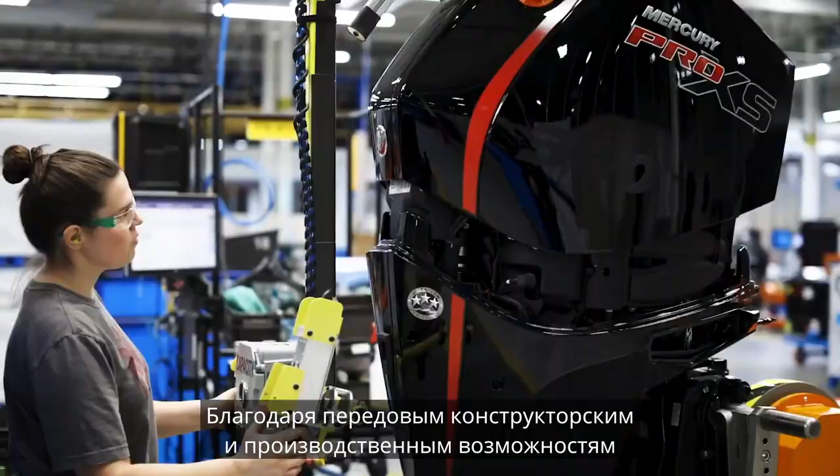Ours is a history of firsts and foremosts, a history of constant improvements. Through advanced design, engineering, and manufacturing capabilities, we've set and reset the standards for reliable performance, superior power, and unmatched fuel economy.

Our unyielding pursuit of innovation is why nobody has given boaters more ways to propel their on-water activities with unrelenting reliability, comfort, and efficiency than Mercury Marine.

Today, we once again redefine the way horsepower meets the water.

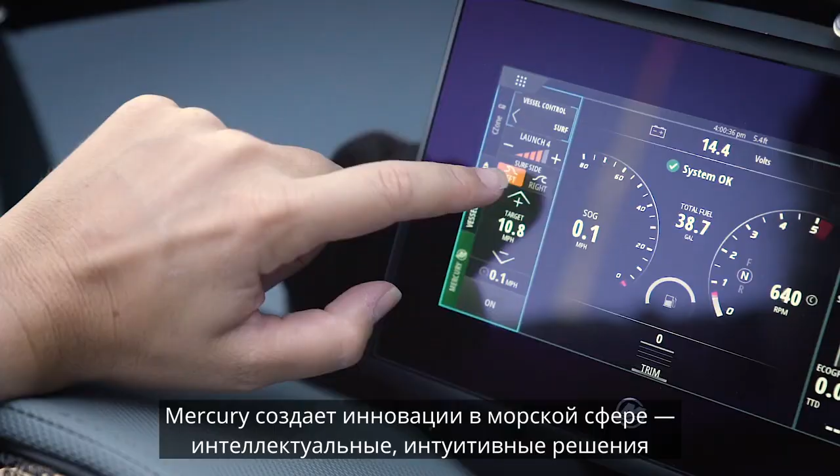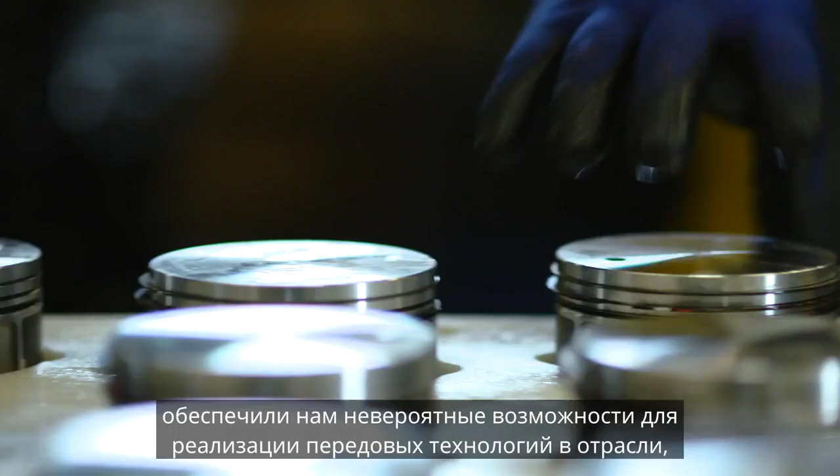At Mercury, we're driving marine innovation forward with intelligent, intuitive solutions that improve the boating experience. All of our investments in engineering and in manufacturing over the last 15 years have given us incredible capabilities to deliver advanced technology to the industry.

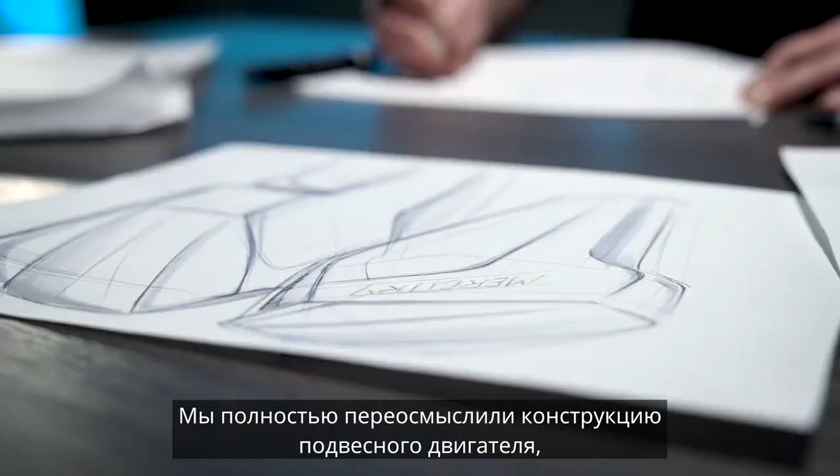I'm Chris Drees, President of Mercury Marine. I'm really excited to share with the world a product that exemplifies Mercury's commitment to innovation. We completely reimagined outboard performance to design an engine that delivers boaters the freedom, luxury, and power to pursue their passions on the water. In order to bring outboard power to larger boats, we started by changing the limits of what you can accomplish with the marine engine.

It's incredibly reliable with less maintenance required. It delivers remarkable fuel efficiency and range. This is the outboard that lets boaters go farther and do more.

We really pushed the design to make this engine not only more elegant, but also improve the experience while underway. It's the quietest high horsepower outboard ever built. It's remarkably smooth. It truly elevates the standards of premium design and engineering to make your time on the water more enjoyable.

Then we focused on the driving experience and created a new way to steer an outboard engine. With the engine static on the transom, nothing moves above the water. But under the water, the twin-prop gear case steers independently.

Our digital controls and joystick piloting, combined with this innovative feature, make close quarters maneuvering simple enough that anybody can do it, while also delivering exceptional handling at all speeds.

And of course, we didn't hold back on horsepower. We built the most powerful outboard in the history of Mercury. It has an incredible V12 naturally aspirated power plant, 600 horsepower, and the outboard segment's first 2-speed transmission, which can power the heaviest boats out of the hole quickly while contributing to unsurpassed fuel economy and sound levels at cruise.

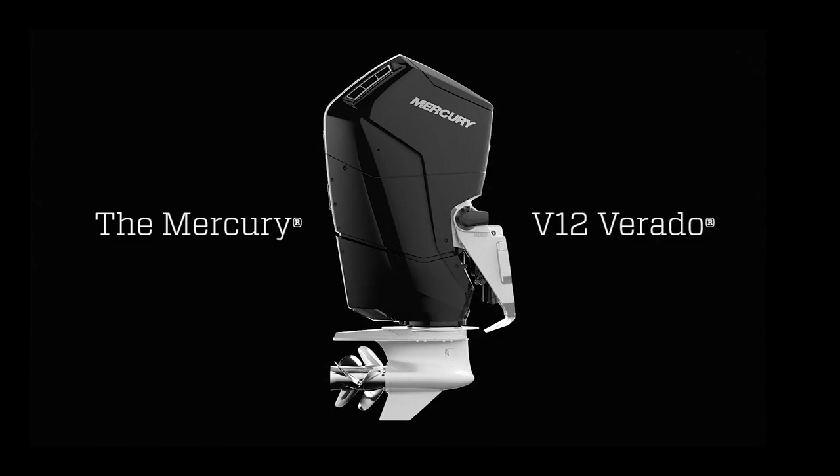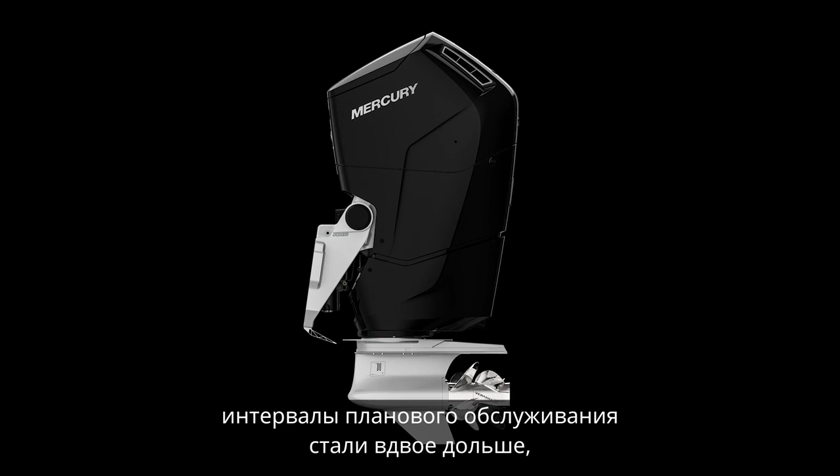The new V12 600 horsepower Verado really raises the bar for outboard performance. We did this by building on the world-class engineering standards that we established with the original Verado outboard. It's even quieter and smoother than any previous Verado, can run twice as long between scheduled service, and has the technology to deliver profound fuel economy.

And by rethinking how every engine system interacts, we are able to deliver high horsepower performance that our customers demand, while providing a luxury boating experience not possible with any other outboard. I'm Tim Reid, Vice President of Product Development and Engineering at Mercury Marine.

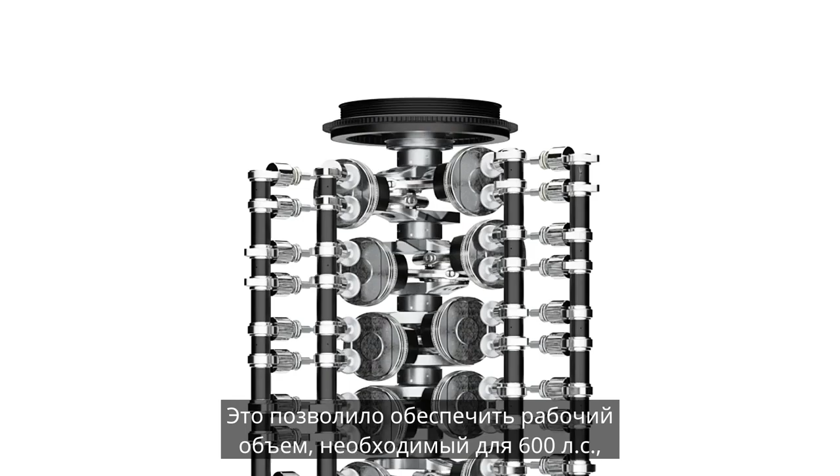We started by engineering a naturally aspirated, narrow-angle V12 powerhead. This allowed us to achieve the displacement needed for 600 horsepower while still occupying less transom and cockpit space than competitive high-horsepower products. That's a huge practical advantage in the market, where boaters are constantly looking for more total horsepower.

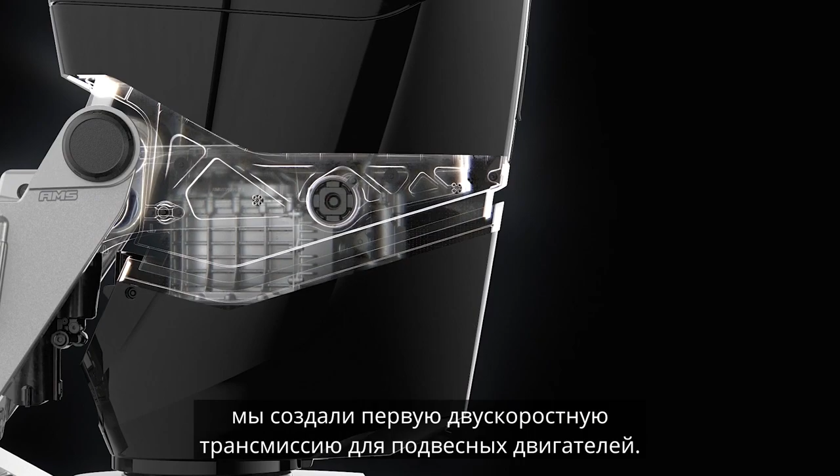We also knew that we needed to deliver a high-level acceleration and performance on bigger and heavier boats. To accomplish this, we developed the outboard industry's first two-speed automatic transmission. First gear is 20% lower than second gear, which generates high propeller torque and the ability to accelerate the boat and get it on plane quickly.

The engine continues to deliver power and acceleration through its power shift all the way to rated speed. But the most impressive part about the transmission is, unless you're watching the tach, you won't even know it shifts. It's so smooth that it's nearly imperceptible.

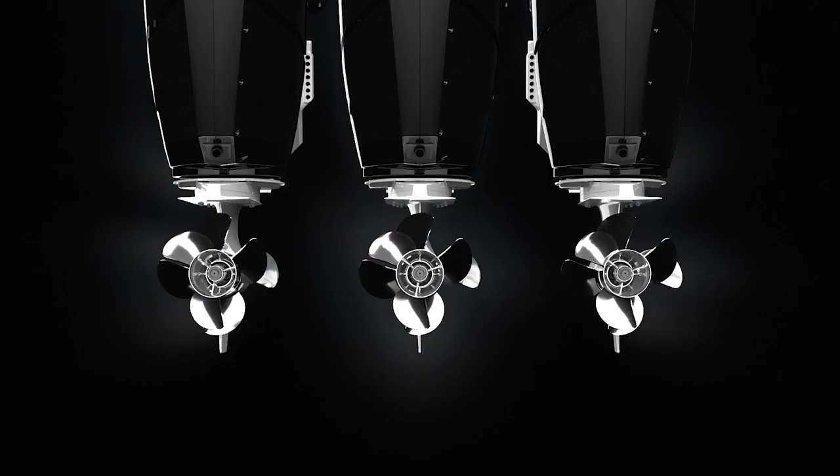As we considered ways to improve handling and make the experience of driving a large boat easier, we engineered a remarkable solution. The V12 Verado has the outboard segment's first steerable gear case. While the gear case steers, the rest of the outboard remains perfectly still on the back of the boat.

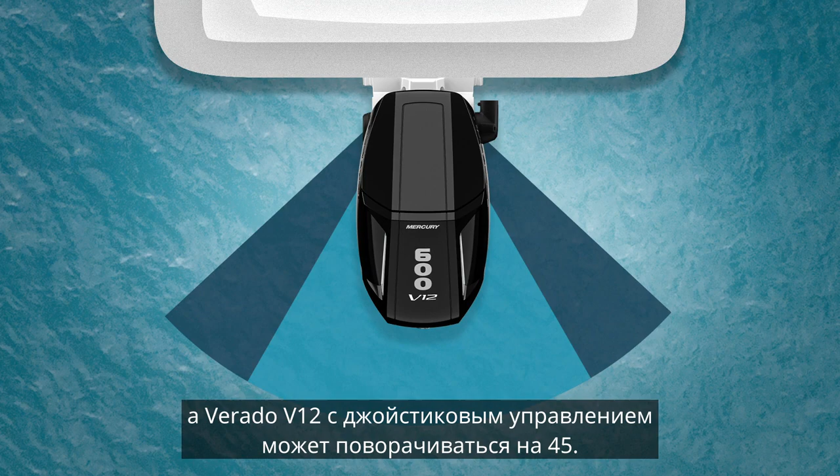This helps with mounting multiple 600 horsepower engines in less space on the transom. But the steerable gear case also enhances maneuverability and the experience of operating the boat. While conventional outboards typically steer 30 degrees each way, the V12 Verado can steer 45 degrees under joystick operation. That gives much more authority to effectively maneuver a large boat.

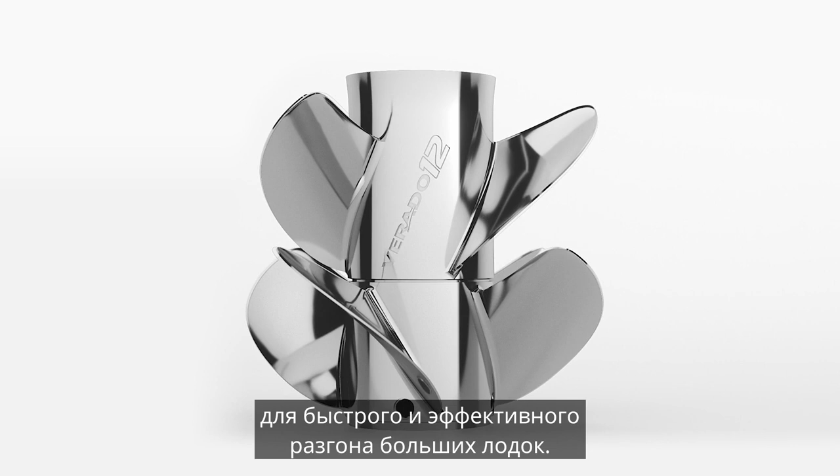Counter-rotating props provide the large blade area and lift needed to get big boats out of the hole quickly with better efficiency.

And with the lower propeller speed in first gear, you really get precise handling at docking speeds. All these advanced features deliver a true luxury boat experience for recreational boaters. Yet we also designed this engine to be reliable and durable enough to meet the demands of our commercial Sea Pro customers. That means rugged components, superior hardening, and an incredibly high level of validation to ensure the V12 Verado delivers years of reliable performance.

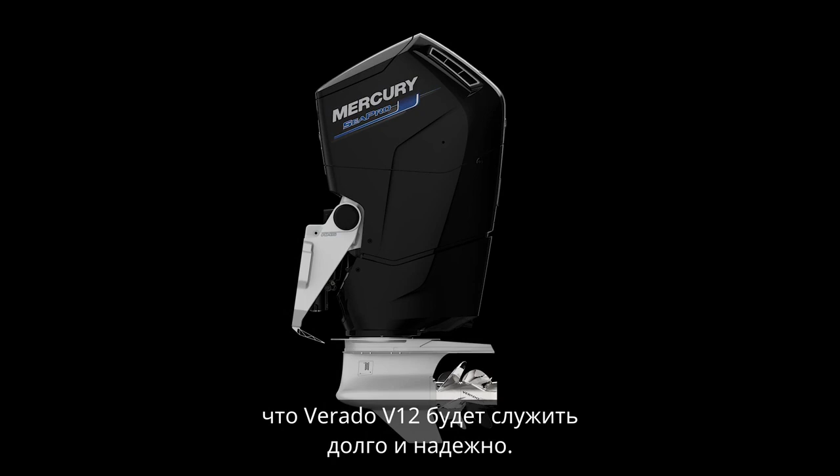Which takes us back to the legacy created by Verado. This is the most powerful outboard we've ever built. Yet every time we take someone out in the boat to experience it, they're blown away by how smooth and quiet it is. They can barely hear the engine running when we drop the throttle and it puts them back in their seat. And you can just see them light up. Wow! And they get it. It's luxury performance that could only come from Mercury.

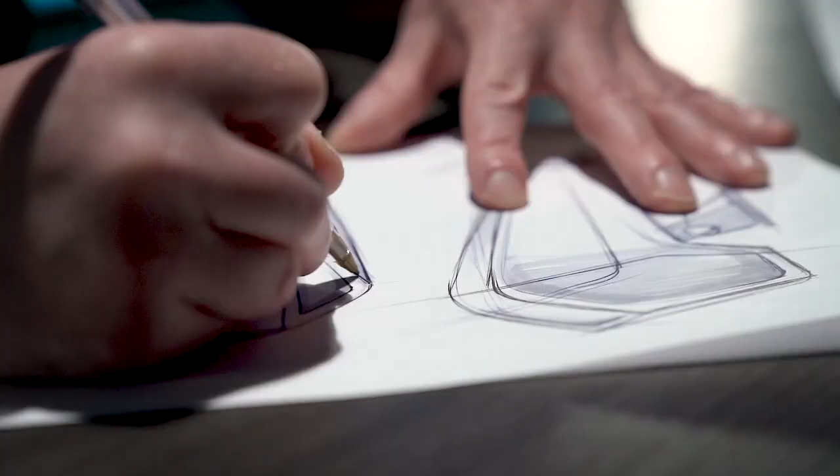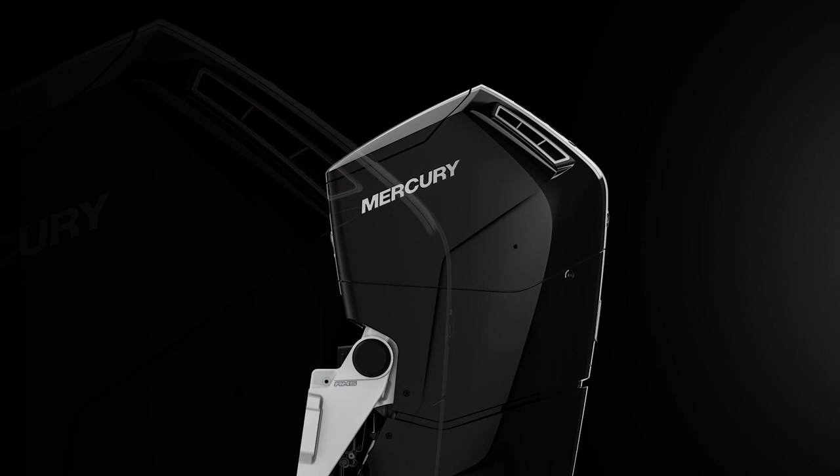Our strategy when we were creating the V12 Verado was we wanted a design that evolved the Mercury DNA forward. Like all of our recent outboards, it's a really visually dynamic engine. It looks fast, even when it's sitting still. It has a defined backbone that sets up what we call the push, where it looks like it's pushing the boat forward, ready to propel you on your next adventure.

I'm Todd Dannenberg, Director of Industrial Design at Mercury Marine. We wanted this engine to have an even bolder design than our successful V8 and V6 engines, but not be so aggressive. So it stands up a little more.

It has a very monolithic form, like it was carved from a solid piece. You can feel it has a very bold and confident presence. Even the lines on the engine have a sense of calm about them. They're long. You can follow them from the top to the bottom. There are no abrupt turns. It's less fighter jet and more corporate jet. Very clean, very steady. And when you look at it, especially mounted on a boat, it just feels right.

It feels like what a luxury outboard should be. Strong, reliable, sophisticated, refined. Our other goal is to create a design that really elevated the boating experience. You can start seeing that with the controls.

The V12 Verado has Mercury's new next-gen digital throttle and shift system. The new controls are sleek, ergonomic. We made them more intuitive by adding features like push-button access to active trim, which automatically adjusts trim for optimal performance, and the option for a digital display on the control. They're designed to draw your hand to the throttle, and when you touch them, you can't help but want to drive this engine.

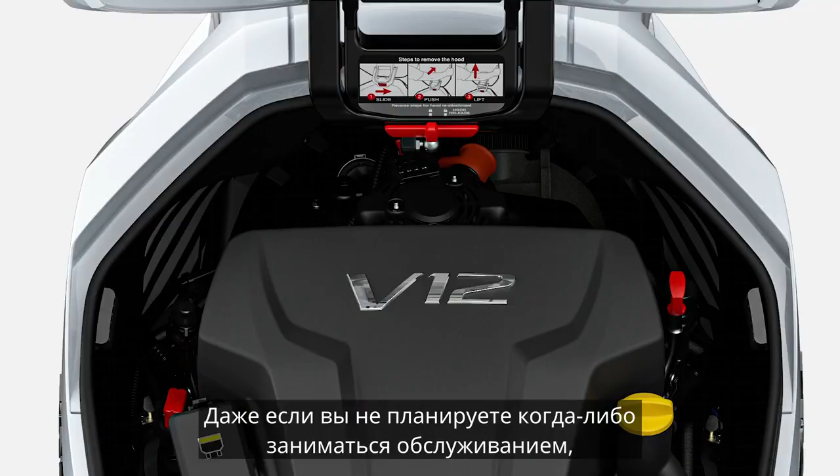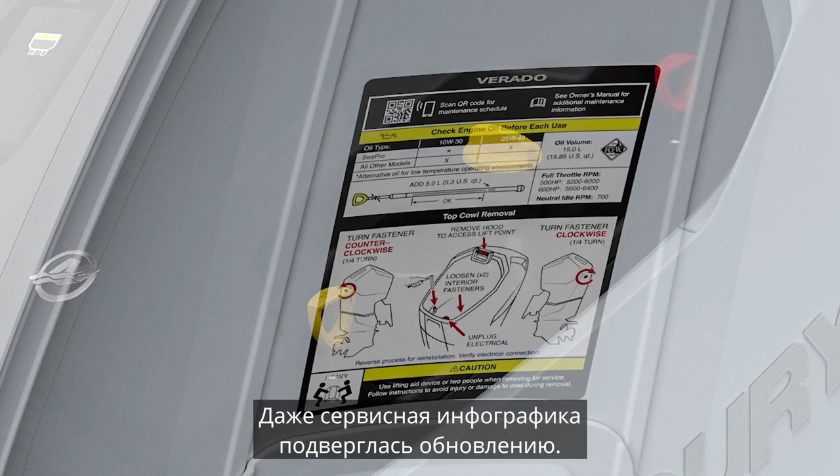And functionally, the hood allows for service to be done with the boat still in the water, so you don't have to hassle with hauling the boat out. Even if you never plan to do your own maintenance, when you look under the hood, you can see that we've scrutinized every aspect of this engine. It's very clean, the touch points are color-coded. Even the service infographics went through months of refinement. The fact we went through so much effort to perfect the little details really emphasizes how advanced the design of the entire engine is.

There's nothing like this engine out there. It doesn't follow any trends. The V12 Verado sets the trends. It's truly an enduring flagship for the Mercury brand.

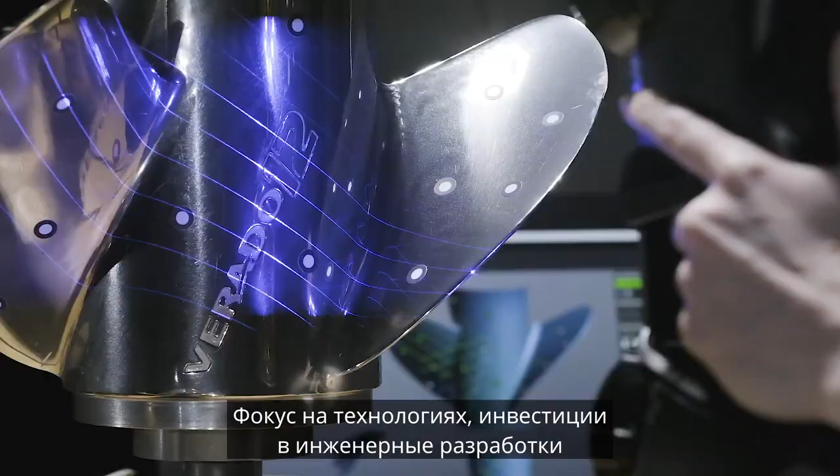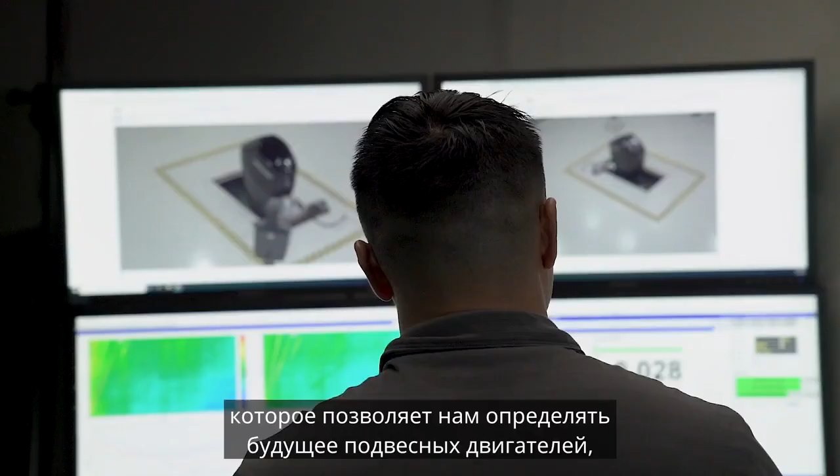Focusing on technology and investing in our engineering and manufacturing capabilities are what enable Mercury to create innovative products like the new V12 Verado. Those capabilities also put us in a unique position to really define what outboard performance will be in the future in a way that will have major impacts on the boating industry.

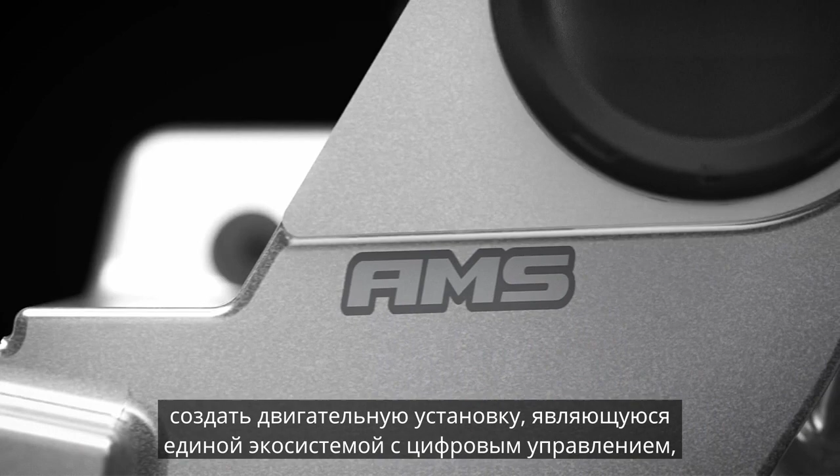We're really proud of this engine. It captures what's possible when you apply consumer feedback to design marine propulsion as a complete ecosystem that incorporates digital controls, intelligent fuel systems, hydrodynamics, propeller design, and all the other concepts that Mercury has mastered.

The V12 Verado delivers a new level of capability and luxury for Mercury and provides boat builders options they never thought possible. And finally, as you should expect from the leading innovator in marine propulsion, this launch marks the latest, but certainly not the last leap forward in Mercury's journey to redefine performance and reliability for boaters.

Freedom to seek new horizons. Luxury beyond expectations. Power to reach new waters. The Mercury 7.6-liter V12 600 horsepower Verado outboard. Powerfully crafted, gracefully refined.